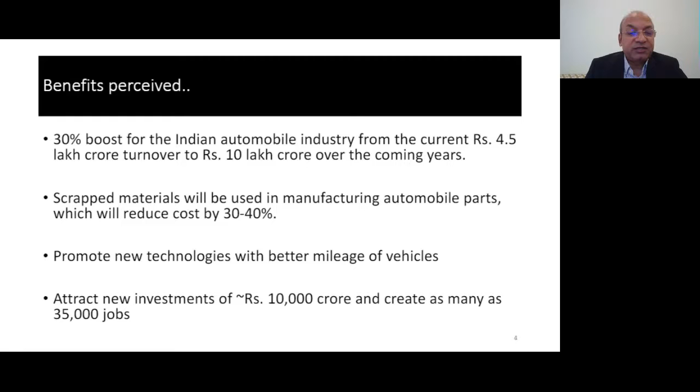Also, it will put a pressure on OEMs to promote new technologies with better mileage of vehicles, attract new investments to the tune of 10,000 crores and create as many as 35,000 jobs. This is a government paper, but I do feel that the job creation will be significantly more than this, because the whole supply chain involves many direct as well as indirect jobs, like the transporters, handlers, the scrap dealers, etc. So the whole supply chain will have to be set up. Let's see the scale of the business.

There are 17 lakh medium and heavy commercial vehicles that are older than 15 years without any valid fitness certificate, 51 lakh light motor vehicles older than 20 years, and 34 lakh light motor vehicles older than 15 years. So that's the kind of population we are talking about, which is fit for scrapping even today if the policy is enacted today. So this entire population should be going into scrappage. So we see an enormous amount of vehicle population which will go into scrappage once the policy gets enacted.

Also, the average age of commercial vehicles is over 10 years, and the private vehicle is 10 to 15 years. We tend to use, we sell the vehicle, then the vehicle goes into a second life, etc. Now, coming to the material reclaim, and just a broad estimate looking at the steel and the non-ferrous material like aluminum, these are the two major materials that we foresee which will be reclaimed from scrappage.

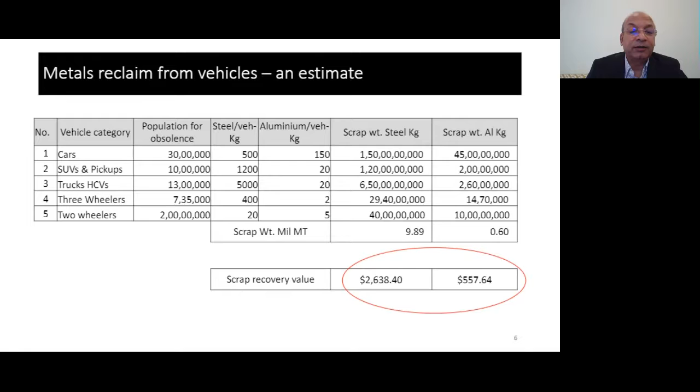Okay, we see something like 10 million metric tons of scrap coming immediately, and right in the beginning, we are estimating a median of 50% of the population to be coming for scrap. So with that, also we see something like 10 million tons of steel coming into the market, as well as half a million ton of aluminum. So the value of this, at a very conservative estimate, is something like $3 billion.

So at the very beginning, we don't see the entire population of vehicles will come into scrappage. But as the time progresses, as the supply chain gets installed and the whole industry matures, we do see that this policy will be enacted in its entirety by a law, and the vehicles will have to be mandatorily scrapped. So we do see an industry scale of something like 6 billion US dollars annually. So that's the kind of industry business value of scrapping of vehicles that is foreseen. Something like $6 billion worth of industry will be created just by scrapping of vehicles.

Just to give you a comparison, in the Indian scenario, the foundry industry market size currently is about $19 billion. It's a very fragmented market with lots of unorganized players, and there are regions like in Punjab, Jalandhar, Mandi Gobindgarh, then Satara in Maharashtra, etc. There are pockets where these kind of foundries exist, and they buy a lot of scrap for remelting, etc. So this whole industry will have to undergo a complete changeover and modernize and use the scrap which will be available in the Indian market. They will also have to increase their capacities substantially.

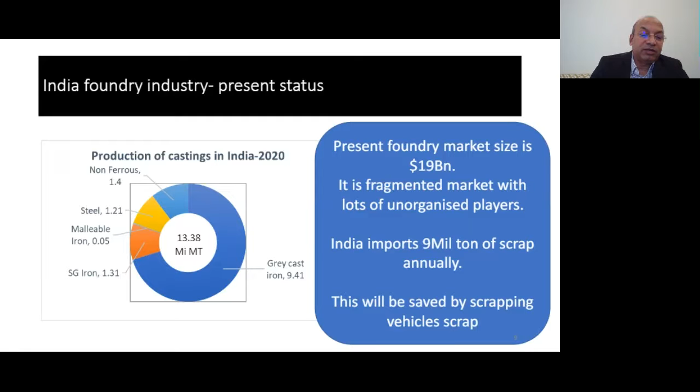India currently imports 9 million tons of scrap. This is the data from the government sources, 9 million tons of scrap. So this will be definitely saved. As I just showed you, around 10 million tons of steel itself will be coming into the market. So we can save that precious foreign exchange.

Now let's see what is happening today. You see, the present vehicle scrapping system in India is practically non-existent. There is no formal industry as such which scraps or recycles the car. Most of the cars, after selling multiple times, end up in junkyards. Parts like tires, plastic parts, electric parts, etc., are sold to the markets where they are opened up and dismantled, and components are taken out, and then they are recycled in a very crude manner.

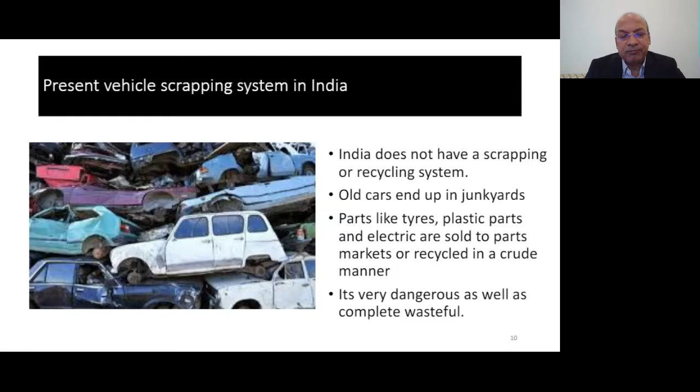So this is a very dangerous as well as wasteful kind of activity, because you are wasting a lot of energy, you are wasting a lot of human effort, as well as you are creating a lot of pollution problems, because vehicles have a lot of heavy metals like lead and palladium, vanadium, etc. So those, if not handled well, are very, very hazardous to human health.

This is just an example. You see one of the scrap yards in Delhi, the non-metallic fraction that remains after the metals are removed, and it constitutes roughly about 25% of the weight of the vehicle. These are the plastic, rubber, and other non-metallic parts. So they are just disposed of in garbage dumps.

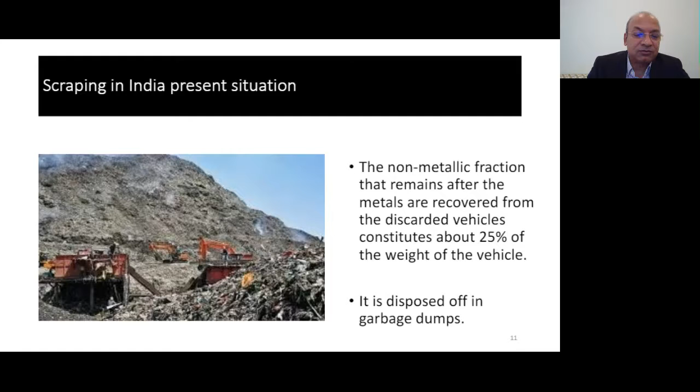See, scrap management in India as it is, is a huge problem. And we know that in cities like Delhi and Mumbai, etc., we are facing a huge shortage of garbage dumps and recycling and incinerators to reprocess this material. So this is a very, very risky and very hazardous scenario.

Let's see now what is happening in global markets. How do they do, and what could be the benchmark for us in India? Globally, auto part recyclers, dismantlers, remanufacturers, and material recyclers, shredders, is a very organized industry, and it is backed by regulators. The regulations are in place where the OEMs are made responsible for reclaiming a particular value of material once they produce the car. It becomes their responsibility. So the complete supply chain for recycling is in place.

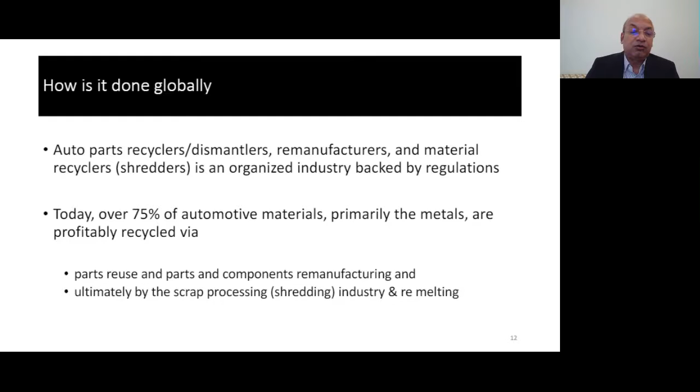And today, over 75% of automotive material, primarily the metals, are profitably recycled via parts reuse and parts and components remanufacturing. So this is very important, remanufacturing, and ultimately by scrap processing, that is the shredding industry, and then the whole material goes for remelting, typically aluminium, zinc, and steel.

Remanufacturing is a very interesting business, particularly in the US. And rebuilding of certain components of dismantled vehicles is done by dismantlers or by repair shops. There are very organized factories and businesses that deal in that. Many automotive components are remanufactured. For example, the data shows that more than 90% of replacement starters and alternators are remanufactured. So this is very important.

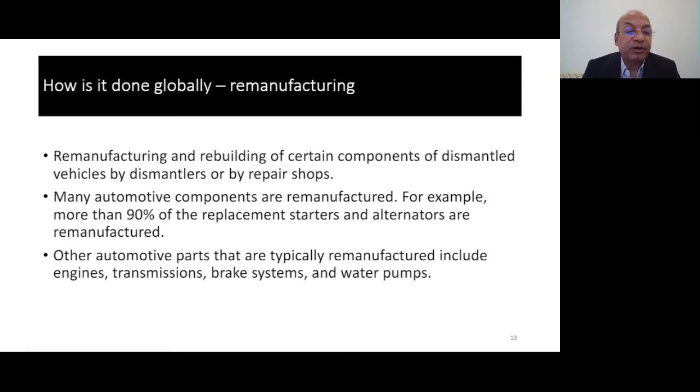You see, electrical parts like starters, motors, alternators use a lot of non-ferrous materials like copper, nickel, etc. They get reused. Other automotive parts that are typically remanufactured include engines, transmission, brake system, and water pumps. Since the life of these parts is much longer than the car, they get taken out and they are reused.

So let's talk about the scientific approach to vehicle scrapping, the topic of my talk today. We need to install a reclaiming industry instead of a scrapping industry. We need to have reclaiming of all the precious materials that go into manufacturing a vehicle, and we need to be able to profitably reclaim it. That is the whole approach that we would like to have in India. We need to manage this industry value chain by using technology.

See, technology is going to play a major part here, right from the vehicle tracking system. Now the government has instituted digital number plates, the high security number plates, which are easy to track, and in the next few years the RTO database, etc., can track the vehicle. So we will know where my vehicle has gone after I resold it, and where it ends up. So the vehicle can be easily tracked.

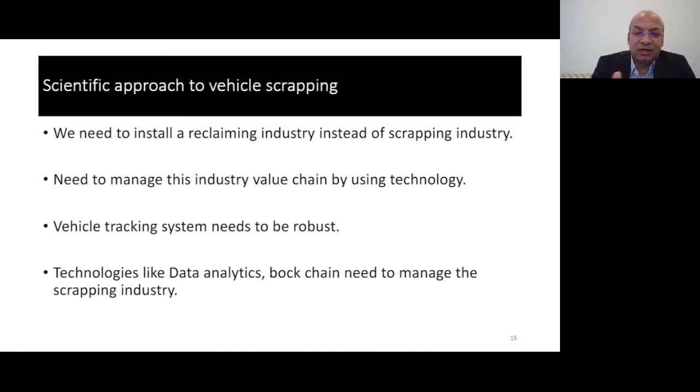Technologies like data analytics and blockchain are needed to manage the scrapping industry. The complete value chain, or the life of the vehicle, can be tracked from cradle to grave using these technologies. So what I'm talking about here is the efficiency mapping of the value chain.

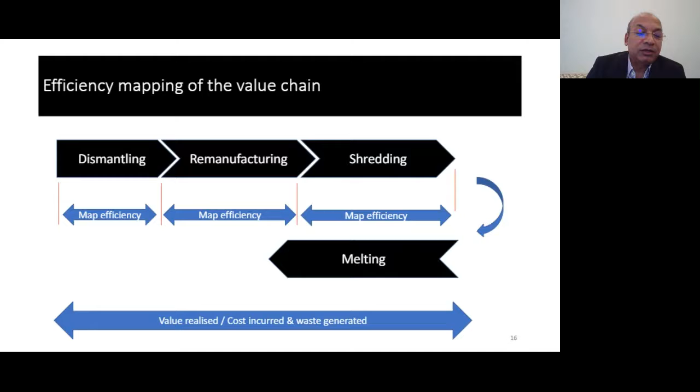The basic activities which are part of this recycling industry are dismantling, then remanufacturing, then shredding, and ultimately remelting the metals. So we need to map each of these activities and see what the efficiency is, what value we add, and the value that we get out of this. And this is how we will be able to institute a very scientific way of doing the recycling. This is shown here.

What happens is when the car is taken for scrapping, first we have to drain out the fluids, the brake fluid, the engine oils and engine coolants, etc. Now these have to be disposed of in a very, very safe manner, and not discharged just in a drain or ground or something. So there has to be zero discharge in the entire process of the recycling.

Then the parts are dismantled, like seats are taken out, the powertrain is taken out, all the fitted parts are taken out, and the body goes for pressing, using big presses, hammers, etc. And the metals get shredded, and they form metal blocks, which are then sold to melting foundries, etc. And these are very prime grade materials.

The auto industry uses very prime grades of cold rolled steel, hot rolled steel, alloy steels, high tensile steel, galvanized steel, etc. And these are of very high value, unlike some products which are not so high grade. So the value extraction out of these materials for the scrap dealers is quite high, and it has to be done carefully. And the other parts like rubber, tires, plastic, etc., are sent separately for recycling.

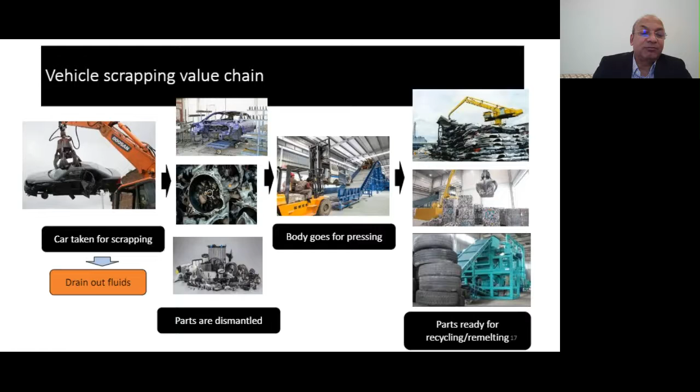So ideally we should be net neutral in terms of our energy used in building the car, and we should see it as a reverse of assembly. But that's the ideal case. It doesn't happen that way, but we should aim for the technology in a way that we reclaim the maximum of it by putting in minimum energy, so that in terms of energy usage we are

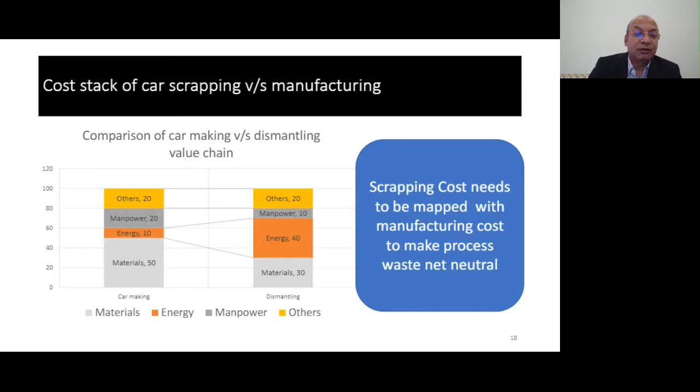least wasteful. Sorry to interrupt you, sir. You have 5 minutes left for the presentation, so I would like you to...

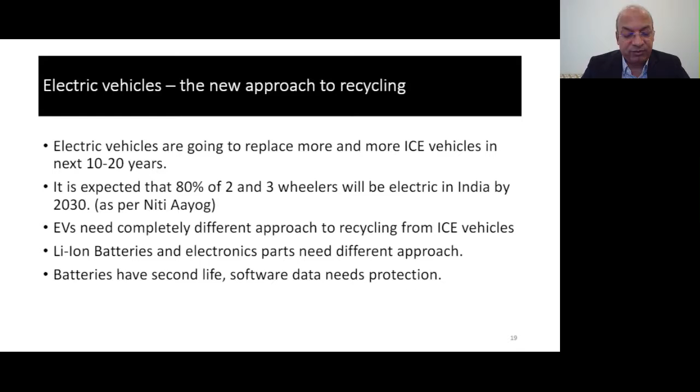Yes, I'm speeding up. Electric vehicles are the new phenomenon that is going to happen very soon, and that will be a new challenge when those vehicles get to the end of their life, because the battery, particularly the lithium-ion battery, has a lot of challenges in reclaiming, etc. So I know I'm just coming to the end of my presentation.

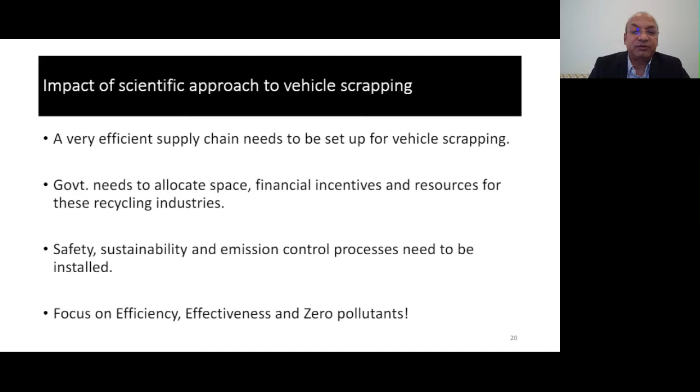A very efficient supply chain needs to be set up for vehicle scrapping. Government will have to play a role here as part of the policy. A large amount of space needs to be allocated. Financial incentives and resources for recycling industries will have to be provided. Let's see once the policy is out what they come up with. But looking at the way government has been taking it up, I'm very sure that they will be very, very industry friendly.

We have talked about efficiency, effectiveness, and energy efficiency. So it's a very big impact to the whole of society. It generates high skilled jobs. It's not just picking up bits of scrap here and there in a very unorganized and dangerous way. This vehicle recycling is a very scientific way, and using high technology, it generates high skilled jobs to manage this business. It has a multiplier effect with thousands of direct and indirect employments, and a positive impact on environment, safety, and clean living for a very large population.

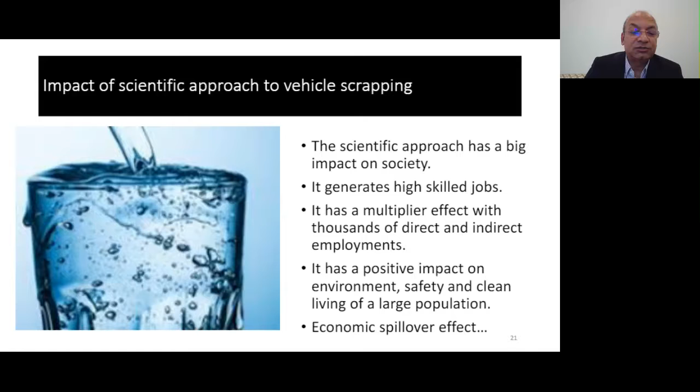So therefore, the economic spillovers are huge. It is not just the $6 billion which is directly coming into the business, but there are much more indirect benefits, as we call the economic spillover. So for an activity to be sustainable, it must be economically attractive and environmentally friendly. It must provide a beneficial service to society in a safe and responsible manner. A sustainable operation is a target we need to strive to attain as the world faces material shortages, increased costs, and more stringent environmental regulations.

So this is something that we have learned from the current pandemic, that we need to conserve resources and we need to be sensitive to the environment. So with this, I conclude my presentation, and I'll be happy to take questions, if any.